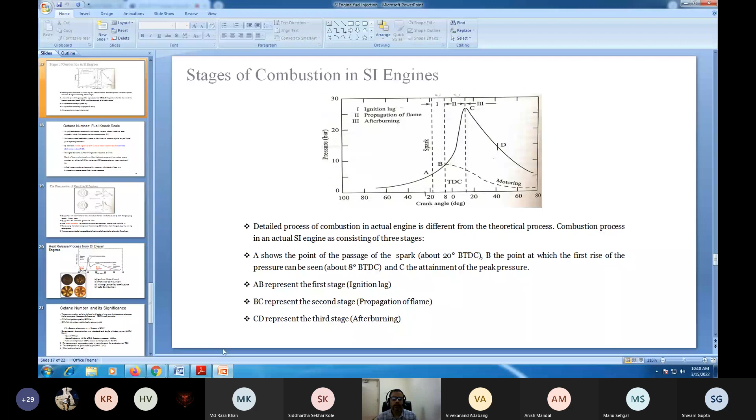Okay, so in the last class, what we have discussed, we have started about combustion in SI engine. Okay, and with the help of the P theta diagram, we try to see that the whole region of the P theta, or the combustion region of the P theta, can be divided into three different areas. One is called ignition lag, that is A to B. So how we can define the ignition lag? That it is the time difference between the instant of a spark and the instant of a start of the combustion.

The start of the combustion is a very tricky thing. It's really very difficult to find out where is the start of the combustion. As from this graph, we can say that whenever the firing P theta is deviating from the motoring pressure curve, then we can say that is the start of the combustion. That's the way the start of the combustion has been defined in this graph. But it might be possible that the combustion is going on with a very slow rate, but that part is not contributing as we can notice in the pressure rise. So that is also possible.

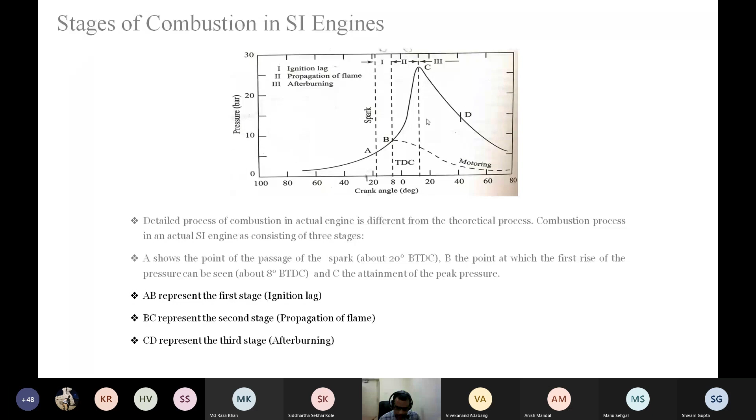So now let us come back. We just started one thing in the last class with a little introduction: in the beginning of the semester we discussed the compression ratio of the SI engine and the CI engine. And in fact you people gave the answer that the compression ratio of the SI engine is lower than the compression ratio of the diesel engine.

And the range of the compression ratio of the SI engine can vary from 5 or 6 to around maximum 13. We can say 13 is the upper limit. As far as the production level, the practical condition, is concerned, probably 12.5 is reasonable to say. Whereas the compression ratio of the diesel engine is very high, and it can vary from 15, 16 to 23, 24, something like that.

Now, that was the beginning of our semester. Then in the middle of the semester, when we were discussing the ideal cycle, the Otto cycle or diesel cycle, we found out that the thermal efficiency is dependent on the compression ratio. As we increase the compression ratio of the SI engine, the thermal efficiency of the engine also increases. But before that, we discussed that there are some limitations on the compression ratio.

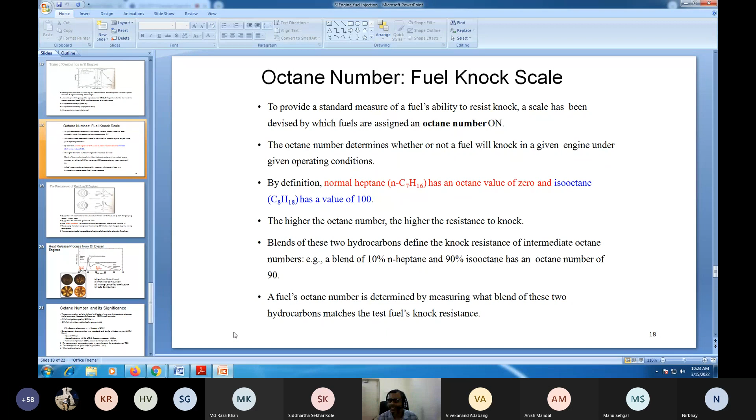Very good. I believe that you know all the things. Only thing is you don't speak. You speak only when I call a specific name. But anyway, that's really very important that all of you know all these things.

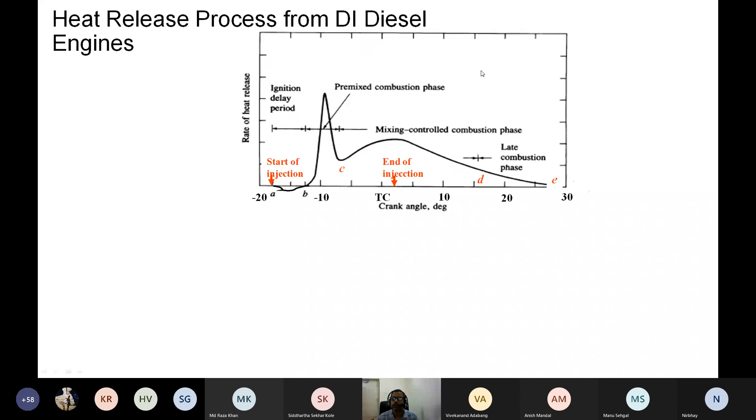Okay, so what I'm trying to say is that the octane number is a fuel property. Even though I have not introduced the term that is called knock. Sorry, what happened? Even though I have not introduced the term, right now take this word, knock. Knock is a kind of phenomenon that is not good. Right now, let us assume it is not good for SI engine combustion, and that's a phenomenon we will discuss in the next slides.

So what is the octane number? It is the fuel's ability to resist the knock. Any fuel that has a higher octane number will resist the knock phenomenon. Knock is the undesirable combustion phenomenon we do not want. And since octane number is the fuel's ability to resist the knock, it means we want the octane number of the fuel as high as possible, so that the fuel can resist the undesirable phenomenon of combustion. Okay.

So gasoline, what we use in India particularly, has an octane number of around 93 to 95. The maximum value, oh, what happened? We assign the maximum value of the octane number as 100. So there is a scale on which the maximum value is 100, out of which the gasoline fuel has the value of 93, 95.

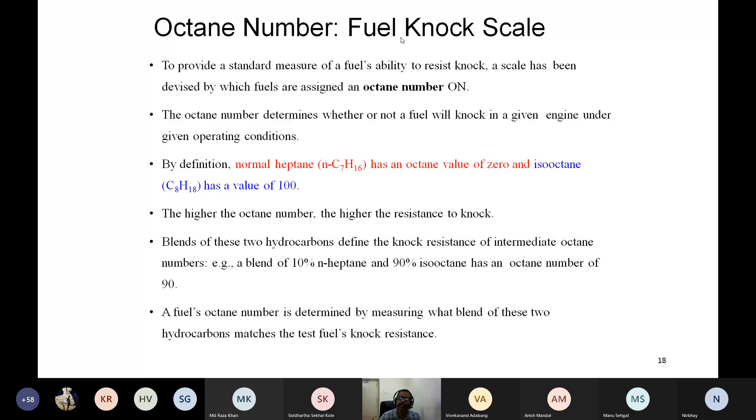But right now we are not going into how to determine the octane number. I will come back to it after the discussion of the next slide, because to determine the octane number of the fuel, I need to explain the next slide first. Here I am just trying to clarify that the octane number is the fuel's property, its ability to resist the knock. Now the question is, what is knock? That we need to understand. It is an undesirable combustion phenomenon. First of all, that line is very important, that knock is an undesirable combustion phenomenon, or we can say

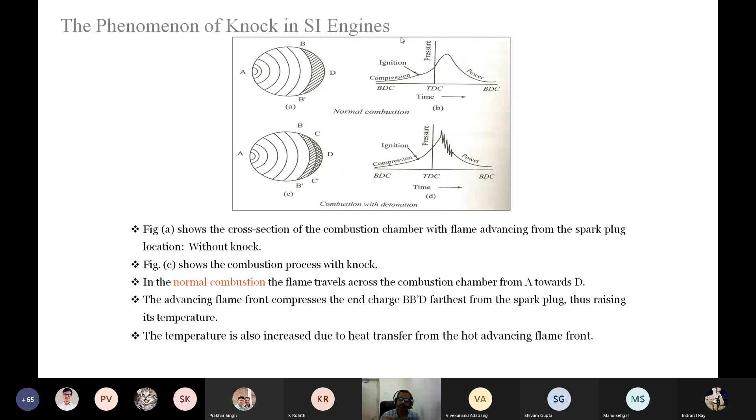Hello, am I audible? Yes, sir. There were power fluctuations in the lab, and because of that, the internet was disturbed. Okay, that's not good. Let me say it once again then. No? Oh, recording is still going on. That is fine. Yes.

So we are discussing what is normal combustion or abnormal combustion. We have discussed SI engine combustion: during the intake stroke, or before the piston reaches top dead center from the previous cycle, the intake valve will open. And what will happen? The fresh mixture of air and fuel will come into the combustion chamber during the intake stroke. Then the piston will reach bottom dead center, and then it will start the next stroke, that is the compression stroke.

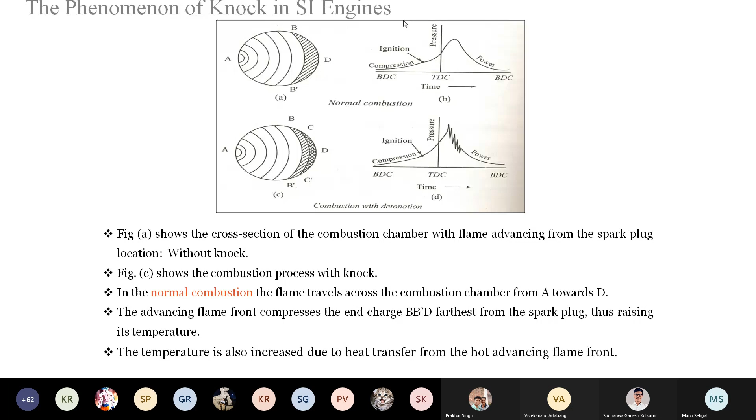Excuse me, sir, your screen is not visible. Oh, really? Let me check it. Is it true for everyone? Yes, sir. Okay, let me share once again. Is it shared now? No, sir. Okay, let me log out and log in once again. Just be here. Let me shut down properly and then